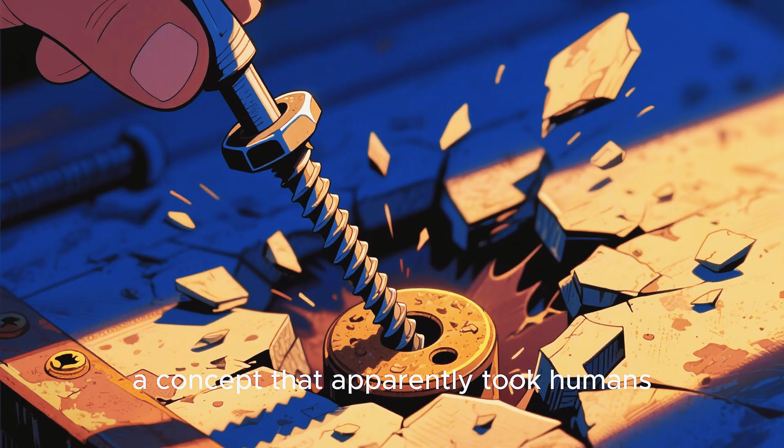The screw changed everything because it actually creates a grip instead of just violently forcing its way through materials like some kind of medieval torture device. And it can be removed and reused, which means you can fix things without destroying them completely, a concept that apparently took humans several thousand years to figure out.

Every piece of furniture you own, every electronic device, every vehicle, every building, they're all basically just elaborate screw delivery systems that happen to have other purposes as a side gig. And if screws suddenly vanished from existence, you'd spend the rest of your life watching things slowly vibrate themselves apart until you're sitting in a pile of components, wondering why you ever took stability for granted.

Next up is the washer, which is literally just a flat ring of metal that sits under a bolt or screw and distributes pressure so things don't crack or break under stress. And I know what you're thinking, wow, riveting content, a metal donut is saving civilization.

But here's the thing. Without washers, every single structure you've ever been inside would eventually crack and crumble because the force of those bolts would just eat through materials like termites with a deadline.

Washers are the unsung heroes that prevent bridges from developing stress fractures, that turn your morning commute into a surprise swimming lesson. They keep engines from vibrating themselves into expensive piles of regret. And they make sure that the bolts holding together roller coasters stay tight, instead of deciding that today's the day they pursue their dream of becoming independent and letting you experience unplanned flight.

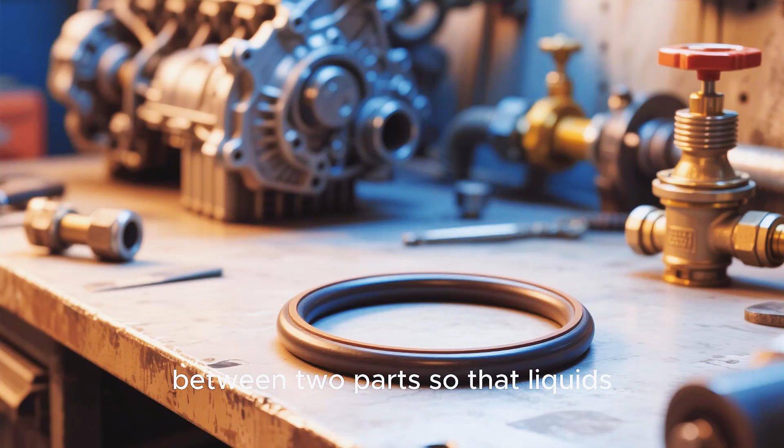Let's talk about the O-ring, which is a rubber loop that creates a seal between two parts so that liquids and gases do not escape and ruin everything you love about modern convenience and survival.

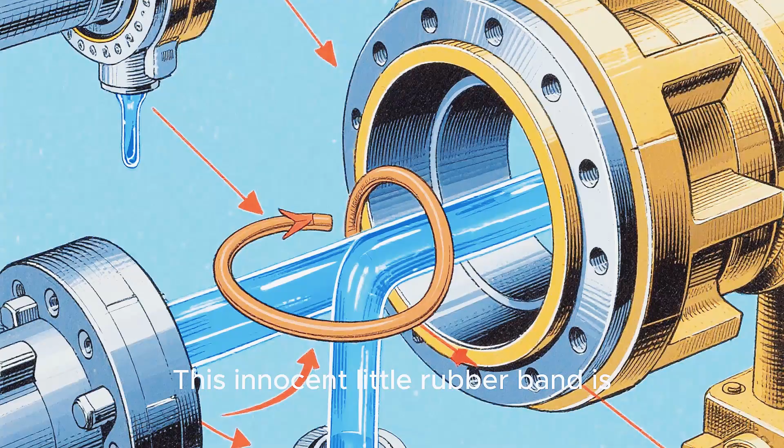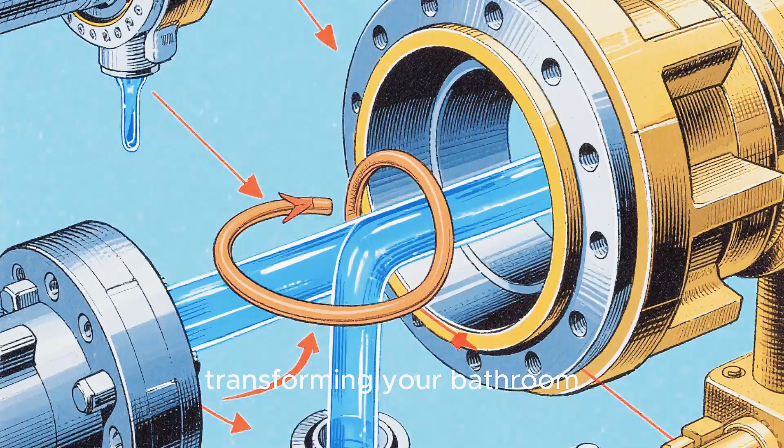This innocent little rubber band is single-handedly responsible for keeping your car engine from turning into a fountain of oil in the middle of the highway, your plumbing from transforming your bathroom into an indoor pool that nobody asked for, and space shuttles from exploding because someone decided that cold weather and rubber seals weren't worth worrying about.

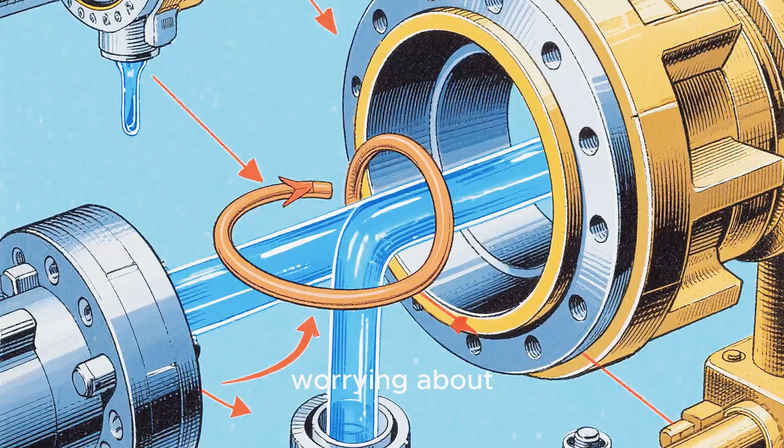The Challenger disaster in 1986 literally happened because an O-ring failed in cold temperatures, which means that a piece of rubber smaller than your morning bagel was the difference between a successful space mission and one of the most tragic moments in NASA history. And if that doesn't make you respect the absolute power of simple objects, I don't know what will convince you.

Every time you turn on a faucet, start your car, use a pressure cooker, or fly in an airplane, you're trusting your life to these circular rubber warriors holding back chaos and destruction with nothing but their elastic determination and chemical composition. And they do it without complaining or asking for recognition, unlike literally every human who has ever done anything mildly helpful and then posted about it on social media for three weeks straight.

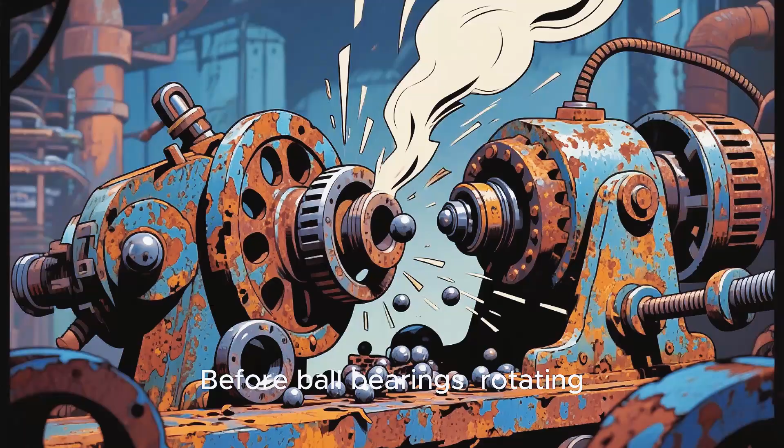Now let's discuss the ball bearing, which is basically just a bunch of tiny metal spheres sitting in a ring that allows things to rotate smoothly without grinding themselves into dust like a coffee bean in an existential crisis. Before ball bearings, rotating machinery was loud, inefficient, and wore out faster than a trending topic on Twitter, which meant that wheels, gears, and anything that needed to spin was basically fighting friction like it was in a boxing match it couldn't win.

Ball bearings changed manufacturing, transportation, and basically every industry that involves movement by reducing friction to almost nothing, which means your car wheels can rotate thousands of times without spontaneously deciding to retire. Your hard drive can spin at ridiculous speeds without turning into a very expensive paperweight, and industrial machinery can run for years without needing to be replaced every time someone sneezes near it.

Without ball bearings, we'd still be living in a world where everything that moves sounds like a haunted house and breaks down more often than a reality TV star's relationships, and modern manufacturing would be impossible because machines would spend more time being repaired than actually making things, which would turn every product into a luxury item that costs more than your rent and takes six months to arrive.

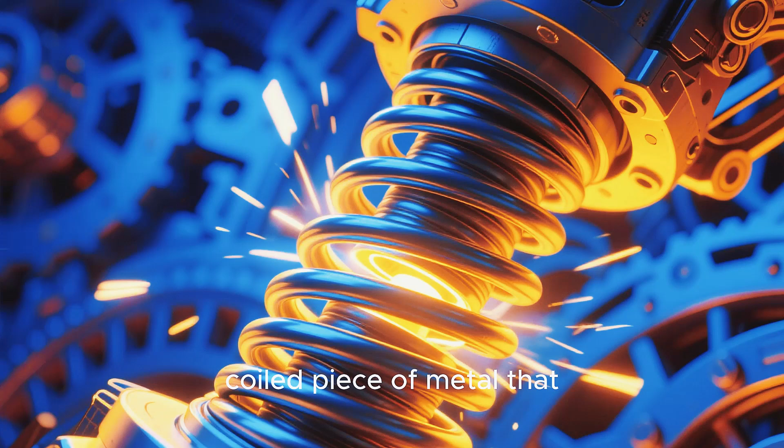Let's move on to the spring, which is just a coiled piece of metal that stores energy when you compress or stretch it, and then releases that energy when you let go, like a tiny mechanical grudge that never forgets and always pays you back.

Springs are everywhere in your life doing jobs you never think about. They're in your pens, clicking the tip in and out so you can nervously fidget during meetings. They're in your mattress, keeping you from sleeping directly on a wooden plank like some kind of medieval peasant. They're in your car suspension, absorbing bumps so you don't feel every single pebble on the road like you're riding a very expensive shopping cart. They're in watches, door locks, trampolines, mousetraps, clothespins, and approximately 7,000 other objects that would be completely useless without them.

Because springs are basically the storage units of mechanical energy, holding on to potential movement until it's needed, and then releasing it with perfect timing, like a friend who remembers your birthday without needing a Facebook reminder.

Without springs, doors wouldn't close automatically, and you'd have to manually shut every single door in your life, like some kind of door-closing servant in a mansion you don't even own. Mechanical watches wouldn't exist, so you'd have to tell time by looking at the sun, like a confused ancient philosopher. And cars would feel like you're riding in a metal box strapped to a wooden cart that's angry at every bump in the road.

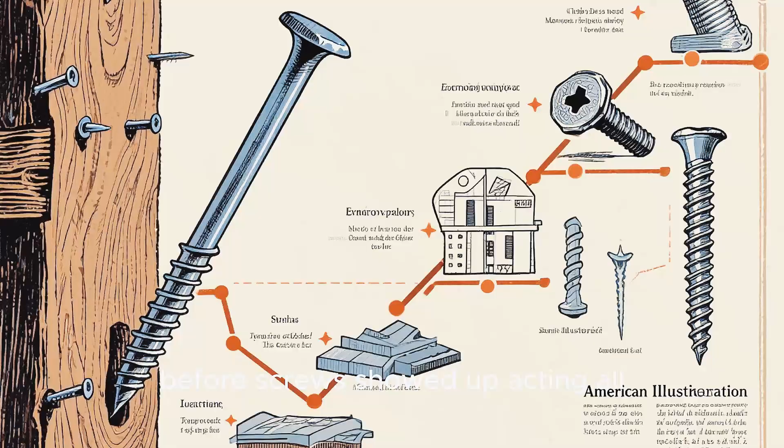Next, we have the humble nail, which might seem like the boring cousin of the screw, but let's be honest, nails built most of human civilization before screws showed up acting all fancy with their threads and reusability. A nail is just a pointed metal rod that you hammer into materials to hold them together through sheer force and determination, which is basically the construction equivalent of solving problems by being really aggressive about it until something works. Houses, fences, wooden ships, furniture, and basically every structure made before the 20th century was held together by nails and prayer.

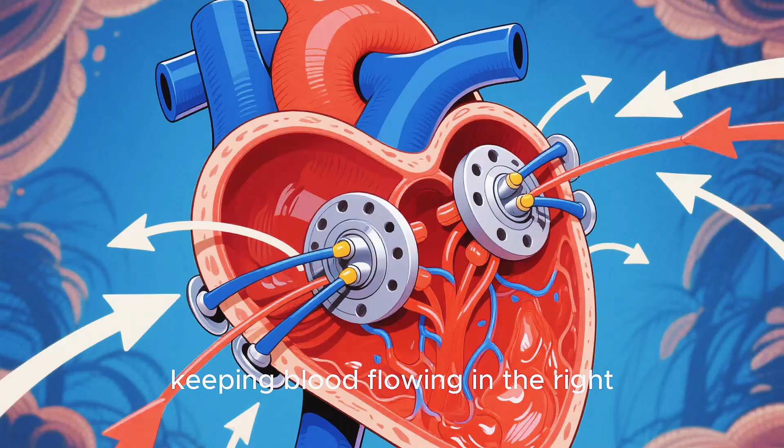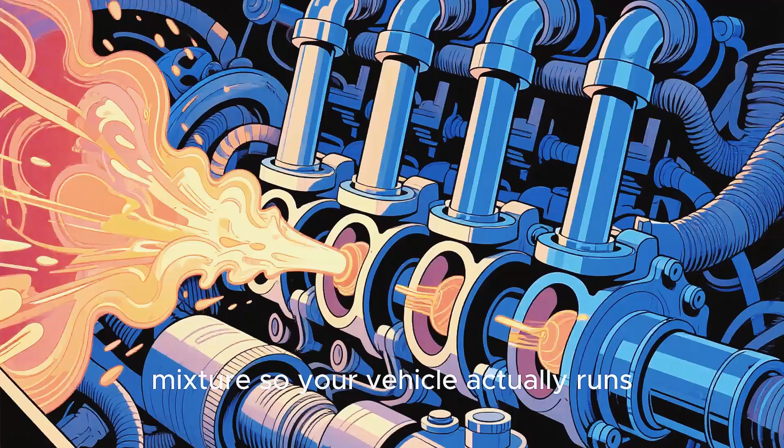Valves are in your heart, keeping blood flowing in the right direction so you don't die from your circulatory system having an identity crisis. They're in your car engine, controlling fuel and air mixture, so your vehicle actually runs instead of just sitting there making expensive noises.

They're in your home plumbing, determining whether water comes out of your faucet or decides to take a vacation somewhere inside your walls, where it can cause maximum damage and insurance headaches.

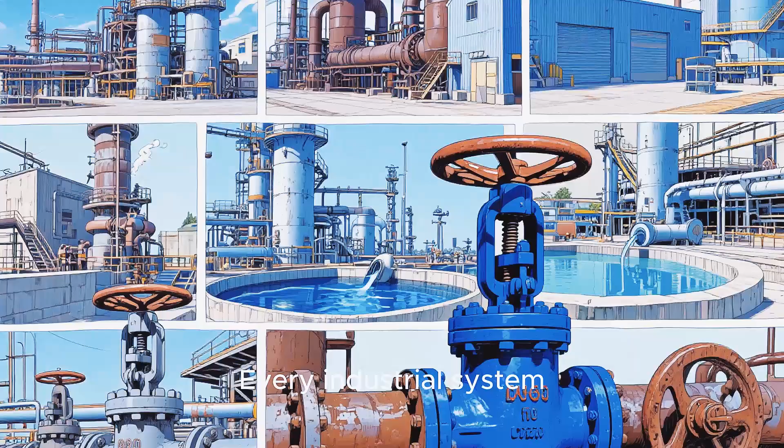Every industrial system, every manufacturing plant, every water treatment facility, they all depend on valves to control flow and pressure, because without them, everything would either be permanently on or permanently off, which would make modern life impossible and turn every home into a chaotic experiment in fluid dynamics that nobody signed up for.

The valve is basically the bouncer of the mechanical world, deciding what gets in, what stays out, and what needs to wait until it has proper authorization, and it does this job billions of times a day across the planet without taking breaks or demanding overtime pay, which makes it more reliable than most humans who complain about being tired after answering 3 emails.

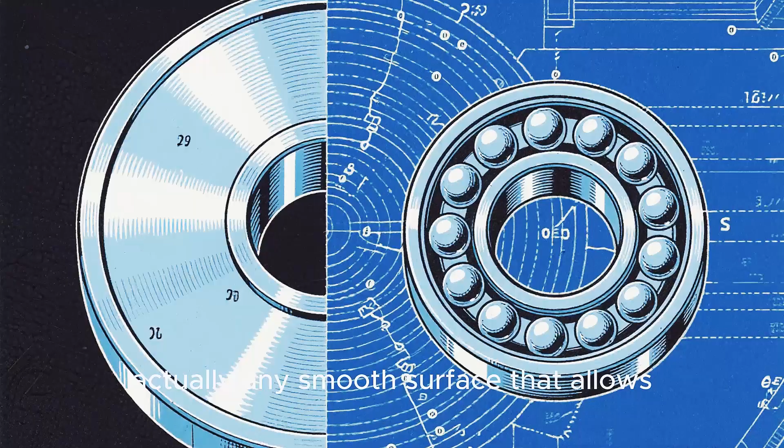Now we need to discuss the bearing surface, which isn't as specific as a ball bearing, but is actually any smooth surface that allows one object to slide or rotate against another without friction turning them both into heat and sadness.

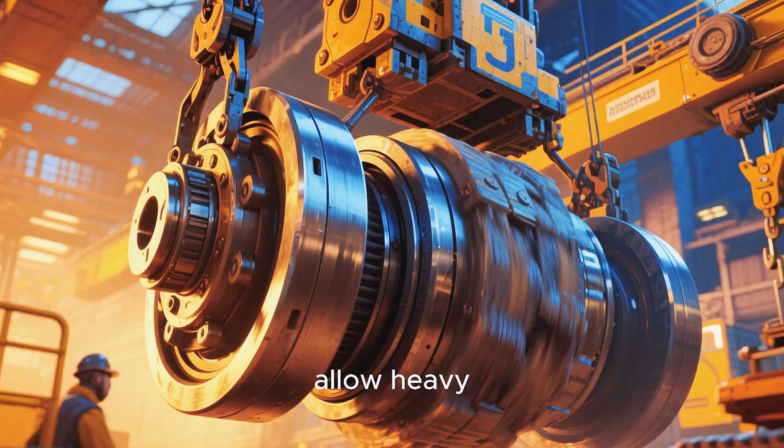Bearing surfaces are what make drawers slide smoothly instead of requiring a PhD in applied physics and a crowbar to open. They're what let doors swing without sounding like a horror movie soundtrack. They're what allow heavy machinery to move enormous weights without grinding itself into a very expensive pile of regret and metal shavings.

Before humans figured out that smooth surfaces with lubricants could reduce friction, moving heavy objects was basically an Olympic sport that required dozens of people, several farm animals, and a lot of hoping that nobody got crushed when something inevitably went wrong, because engineering was more of a suggestion than a science.

The concept of reducing friction through smooth bearing surfaces enabled everything from ancient Egyptian construction to modern manufacturing. And without it, we'd still be struggling to move furniture across the room without calling 6 friends and ordering pizza as payment, which honestly might still be necessary because some couches are just evil regardless of physics.

Let's address the gasket, which is basically a piece of material that sits between 2 surfaces to create a seal so that fluids and gases don't leak out and ruin your day by turning your garage into an oil slick or your kitchen into a gas chamber.

Gaskets are in your car engine, keeping oil, coolant and combustion gases where they belong instead of mixing together like a chemical cocktail that nobody ordered. They're in your plumbing, keeping water inside pipes instead of creating surprise indoor water features that significantly decrease your property value. They're in pressure cookers, making sure steam doesn't escape and turn your kitchen experiment into a culinary crime scene that requires explaining to the fire department.

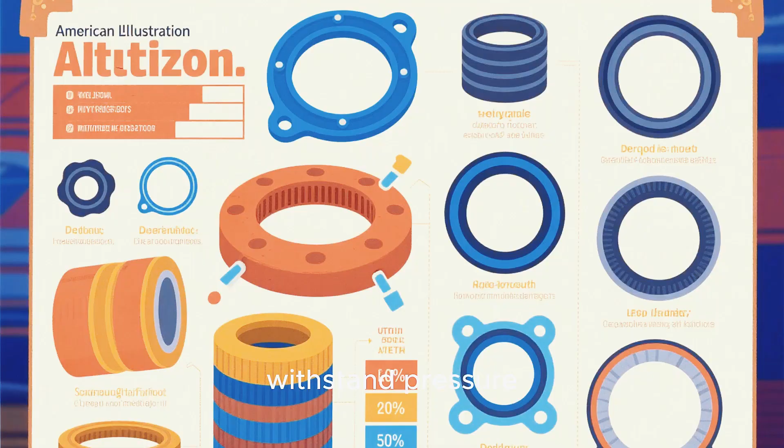The gasket is made from rubber, cork, metal or various composite materials, depending on what kind of seal is needed, and it has to withstand pressure, temperature changes, and chemical exposure while maintaining its integrity, which is basically more commitment than most people show in their relationships or New Year's resolutions.

Without gaskets, every engine would leak, every pipe would drip, every pressure vessel would be a lawsuit waiting to happen, and modern life would smell like a combination of oil, gas, and regret, while you spent your weekends replacing parts that failed because someone forgot that seals are important.

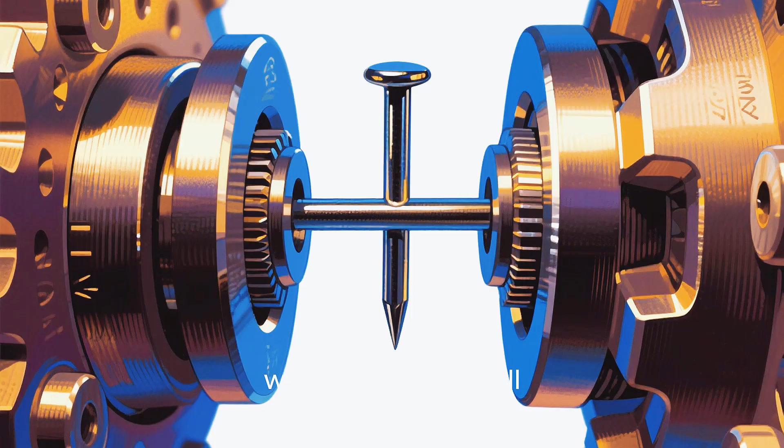Moving on to the pin, which is just a small cylindrical or tapered piece of metal that holds two or more parts together in alignment, preventing them from moving around independently like toddlers in a grocery store who just discovered they have legs and opinions.

Pins are in your door hinges, keeping the door attached to the frame so it doesn't just fall off every time you try to enter a room like some kind of slapstick comedy sketch. They're in machinery, keeping gears and components aligned so everything moves together instead of independently pursuing their own dreams and causing catastrophic failure. They're in grenades as the safety mechanism that stands between you and an explosion, which means that tiny piece of metal is literally the difference between a controlled situation and becoming a cautionary tale that military instructors use to scare new recruits.

Pins are so simple that people don't think about them until they fail. And when they do fail, everything falls apart immediately because pins are basically the organizational system of mechanical assemblies, keeping things where they belong and preventing chaos from taking over like a substitute teacher walking into a classroom of seventh graders who smell weakness. Without pins, doors would collapse, machinery would misalign, and every mechanical system would require constant supervision and adjustment like a very needy pet that somehow costs thousands of dollars to maintain and doesn't even appreciate your efforts.

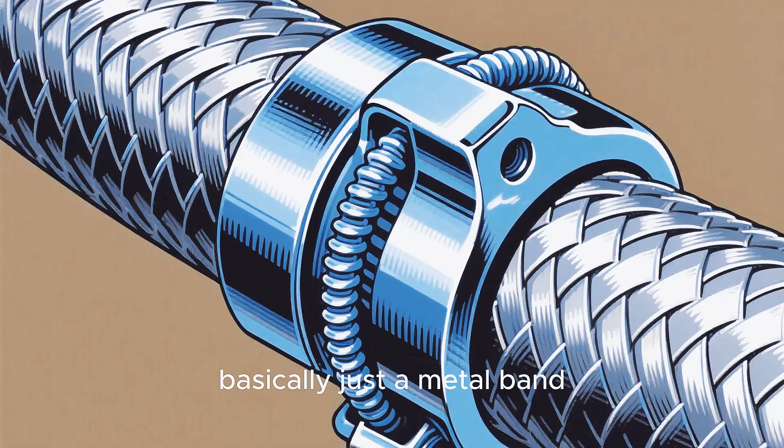Let's discuss the hose clamp, which is basically just a metal band with a screw mechanism that tightens around a hose to keep it attached to a pipe or fitting, preventing it from popping off and spraying fluids everywhere like a garden sprinkler that nobody asked for and everyone regrets.

Hose clamps are in your car, keeping coolant hoses attached so your engine doesn't overheat and leave you stranded on the highway, having philosophical conversations with strangers about whether calling a tow truck counts as admitting defeat. They're in your washing machine, keeping water hoses connected so your laundry room doesn't flood and force you to explain to your landlord why there's a small lake where your apartment used to be.

They're in industrial systems, keeping high-pressure hoses attached to equipment, because nobody wants to be the person who explains how a loose hose caused thousands of dollars in damage and several workplace injuries that could have been prevented by a $2 clamp. The hose clamp is so simple and cheap that people often ignore it until it fails.

Then suddenly they're dealing with leaks, floods, or mechanical failures that cost exponentially more to fix than just using proper clamps in the first place, which is basically a metaphor for how humans approach most problems by ignoring preventive maintenance until everything becomes an emergency that requires panic and expensive solutions.

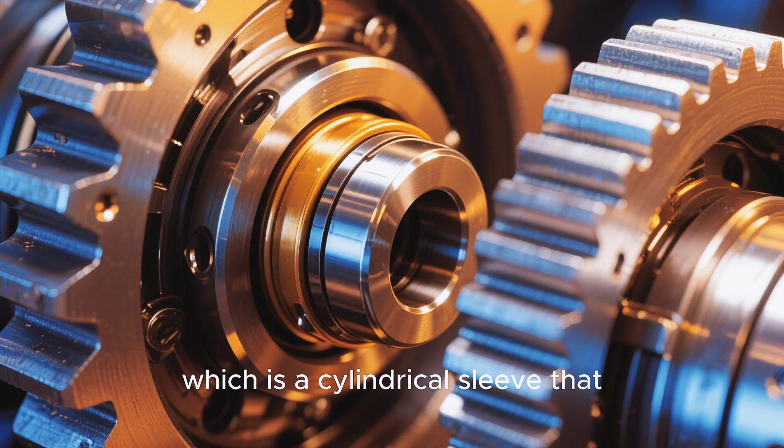Now we need to talk about the bushing, which is a cylindrical sleeve that reduces friction and wear between moving parts, basically acting as a protective barrier that takes the damage so the important components don't have to, like a friend who jumps in front of criticism meant for you and absorbs it with their confidence and lack of social anxiety.

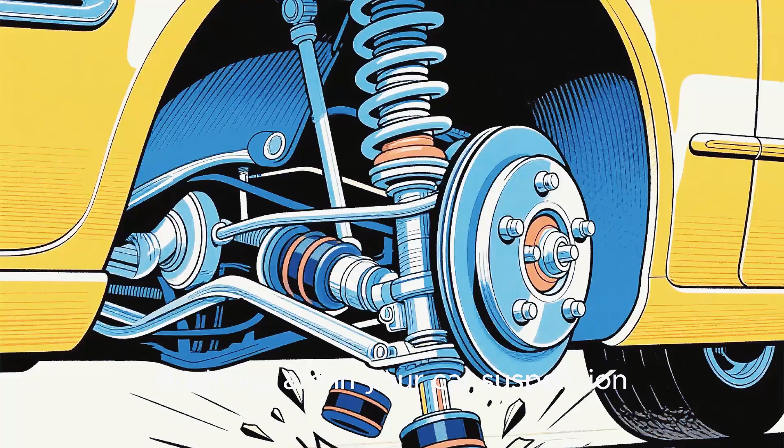Bushings are in your car suspension, taking the impact and movement, so your control arms don't wear out and turn your steering into a guessing game about which direction the car wants to go this time.

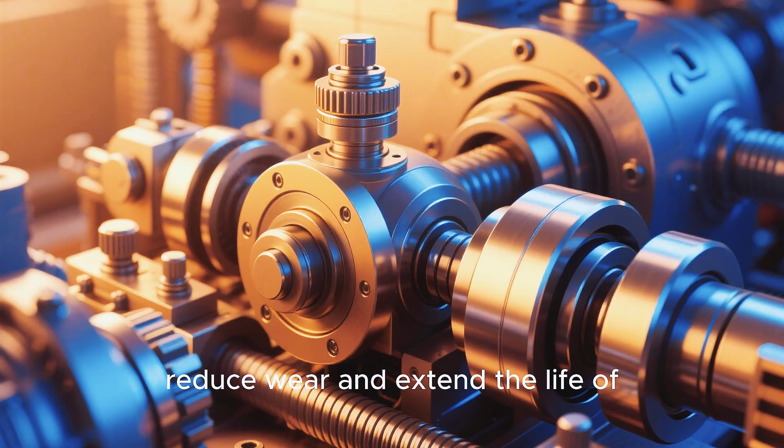They're in door hinges, allowing smooth movement without metal grinding directly on metal, and creating sounds that make you question whether your house is haunted or just poorly maintained. They're in machinery, creating smooth rotation points that reduce wear and extend the life of expensive equipment that would otherwise need replacing more often than your phone screen protector.

Without bushings, mechanical systems would wear out catastrophically fast, because metal-on-metal contact creates friction, heat, and wear that destroys components, like an aggressive relationship where nobody knows when to back off and give each other space.

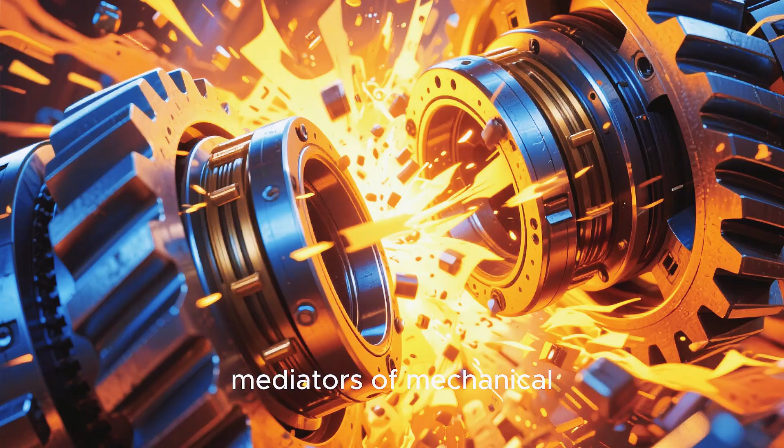Bushings are basically the mediators of mechanical systems, sitting between surfaces that would otherwise destroy each other and absorbing the punishment so everyone else can keep functioning. They do this thankless job until they wear out and need replacing, at which point they're tossed aside and forgotten like a trend from 3 years ago that everyone pretended to care about.

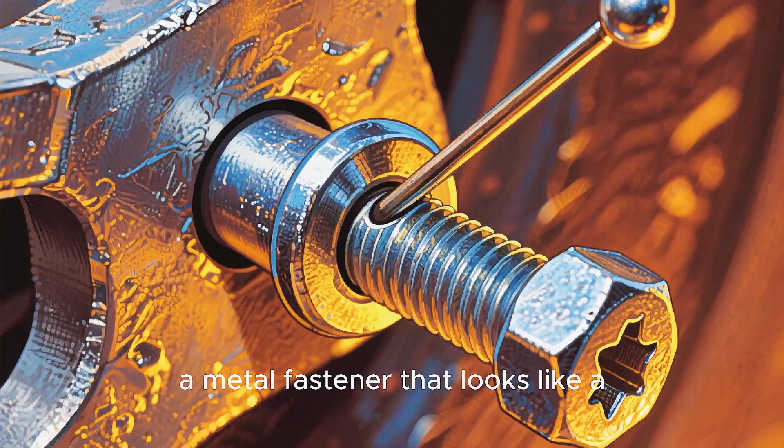Let's address the cotter pin, which is basically a metal fastener that looks like a bobby pin, had an identity crisis, and decided to pursue a career in mechanical engineering instead of holding hair in place.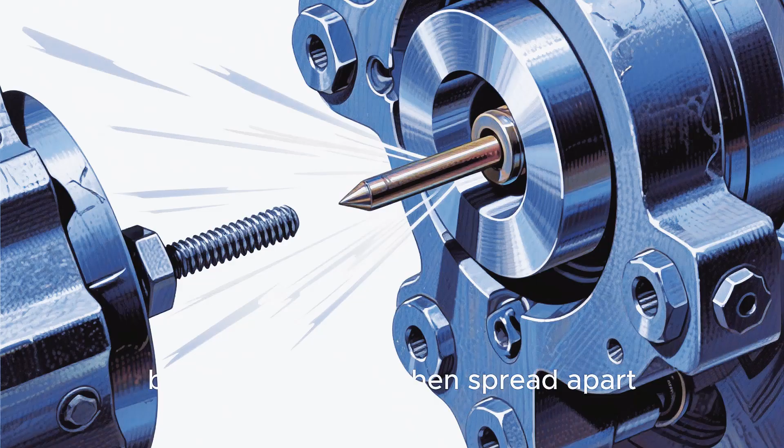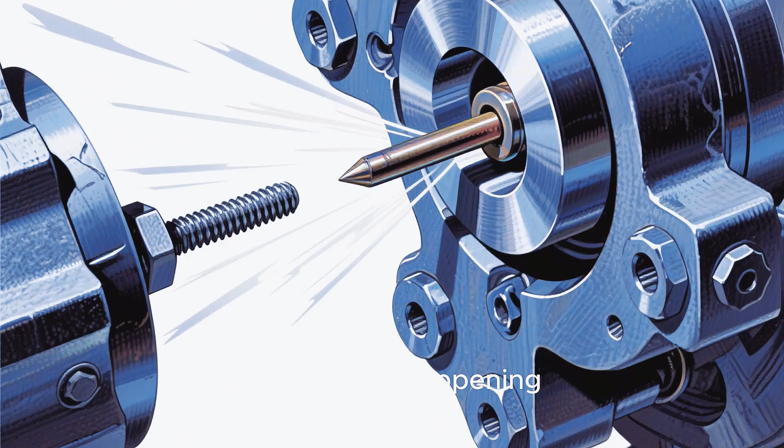Cotter pins slide through holes in bolts or shafts and then spread apart on the other side to prevent nuts from loosening or components from sliding off, which means they're basically the insurance policy of mechanical assemblies that prevents catastrophic failure from happening just because something vibrated loose after 3 months of use.

They're in your car's steering and suspension, keeping critical components from disconnecting and turning your vehicle into a metal death trap that decides which direction to go based on nothing but chaos and poor life choices.

They're in farm equipment, keeping implements attached to tractors, so farmers don't have to explain how they lost an expensive piece of machinery in the middle of a field because a 2-cent pin decided to retire early.

They're in bicycles, keeping wheels attached and brakes functioning, so your ride does not turn into an impromptu lesson about momentum, gravity, and why preventive maintenance is important.

Without cotter pins, mechanical assemblies would gradually lose components, like a person losing their keys, wallet, and dignity over the course of a night out, except instead of just being embarrassing, it would be deadly, because critical parts would fall off moving machinery and cause accidents that make people question whether humans should be trusted with tools more complicated than a spoon.

So here's the thing that all these simple objects teach us. Civilization isn't held together by grand innovations or brilliant technology or some Silicon Valley entrepreneur's vision for disrupting industries that didn't need disrupting in the first place. It's held together by countless mundane objects that nobody thinks about until they fail and everything falls apart, like a house of cards in a wind tunnel.

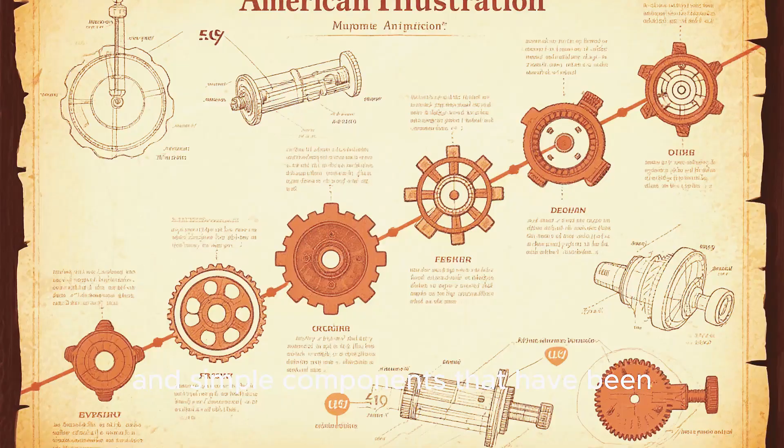These simple objects are the foundation of everything we take for granted, from the chair you're sitting in to the device you're watching this on, to the building you're inside, to the car you drove here. And they all depend on basic mechanical principles and simple components that have been refined over centuries to be reliable, cheap, and effective at preventing chaos from taking over.

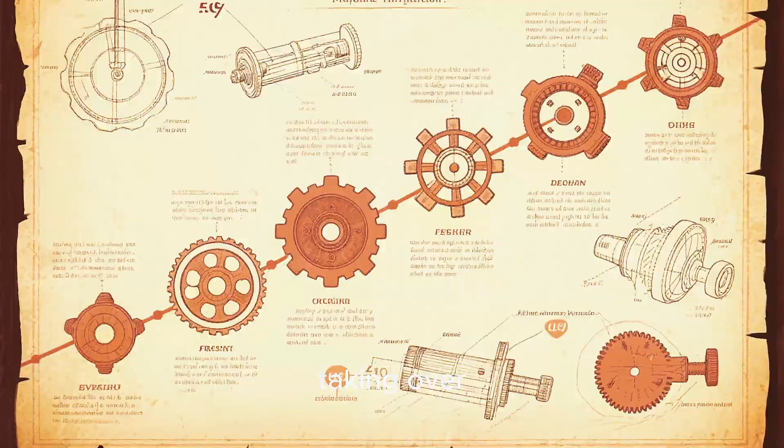Next time you use anything mechanical, take a second to appreciate the army of simple objects working together to make your life possible. Because without them, you'd be sitting on the ground in a pile of broken components, wondering why nobody warned you that structural integrity was important. And maybe you should have paid attention to the boring stuff instead of assuming it would just work forever without maintenance or respect.